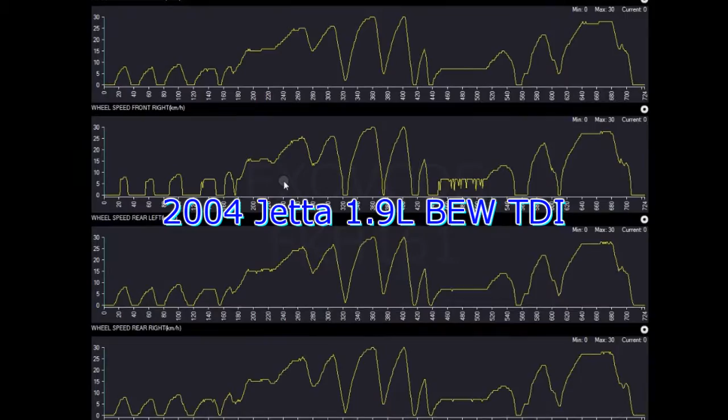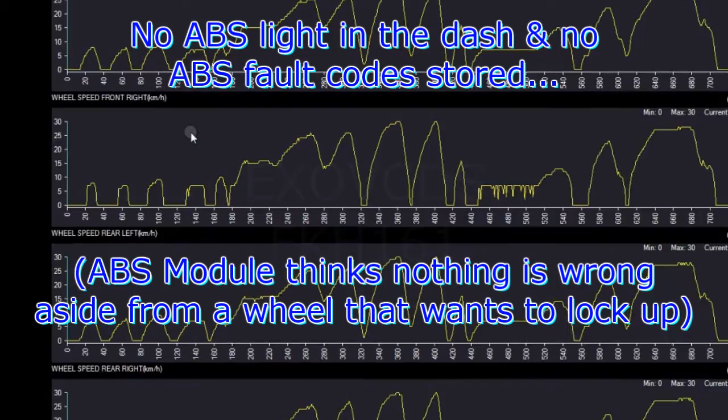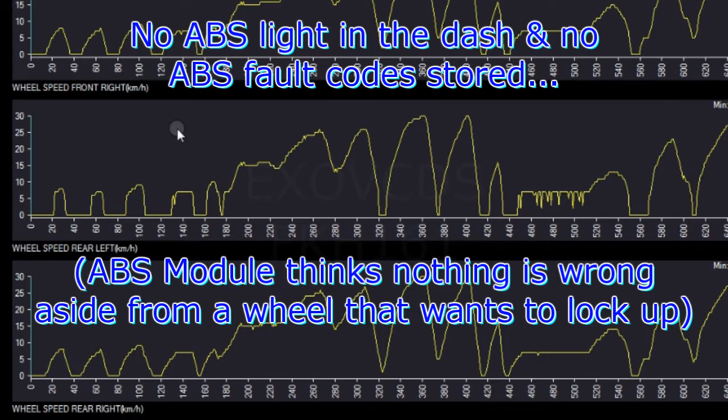Okay guys, this is a Jetta 2004 I think it was, so a Mark 4 or an A4 model. ABS would activate intermittently at slow speeds, mainly when slowing down. ABS light would not come on in the dash, obviously, and by obviously I mean that during normal ABS activation, when the computer thinks that a wheel is locked up, it will pulse the brakes when you're braking to prevent this wheel from locking up, in which case there is no need to turn on the ABS light, simply because it's a normal operation. It's what the vehicle was meant to do, or the ABS module was meant to do.

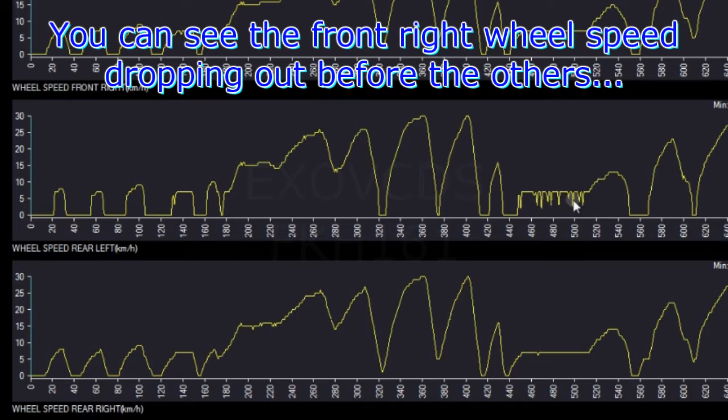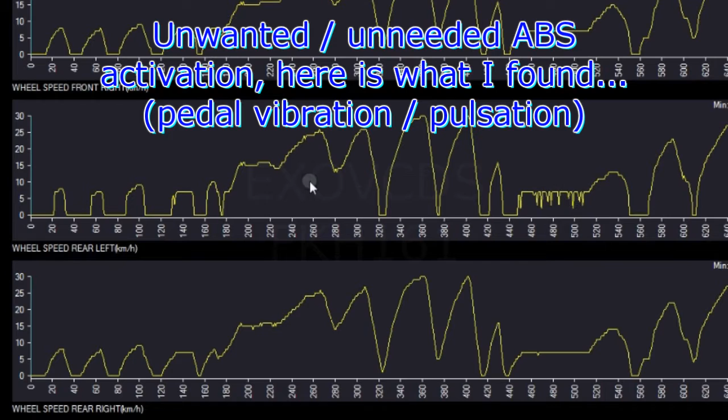So even though there is, let's say, a glitch, you can see the glitch here on that, it says wheel speeds front right. You can see the glitch here and right down in this area, dropping pretty much down to 0 kilometers in terms of speed, whereas the other ones are still registering just above 5, it looks like on the graph here. So basically what was happening was unwanted ABS activation that the customer was complaining about. More so just the pedal vibration, not so much ABS. I don't think the customer was aware that it is the ABS kicking in, just the fact that the pedal was pulsating. And the following clip is what I found.

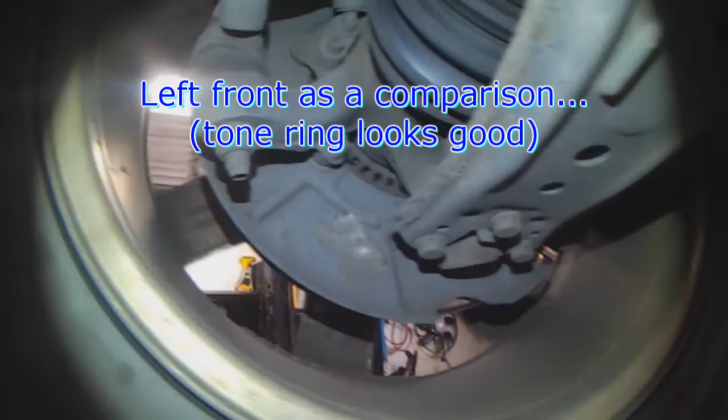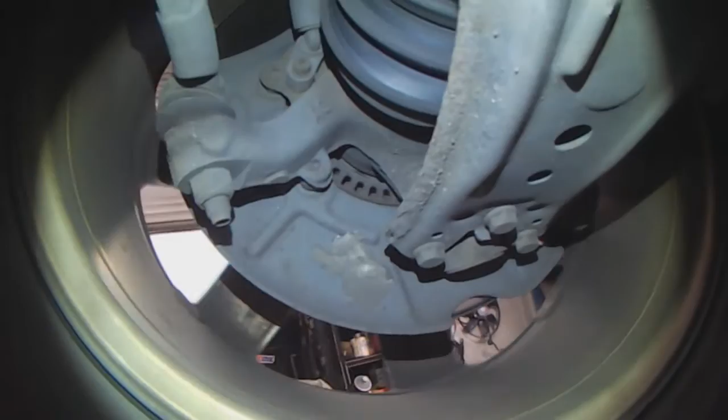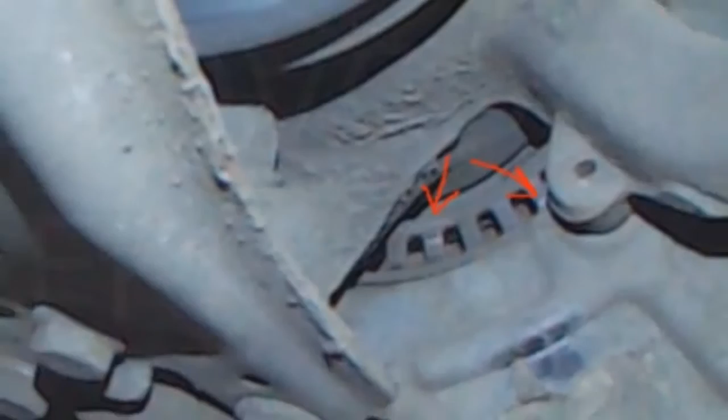So the right front speed sensor is the one that's cutting out at low speed. This is the front left. This is just so you can see or get an idea of the tone ring. It looks nice and even here. And on this one, you can see there's shiny spots. Seems okay right there. And then there's a shiny spot again. So maybe at one point in time something got jammed in there and it was rubbing.

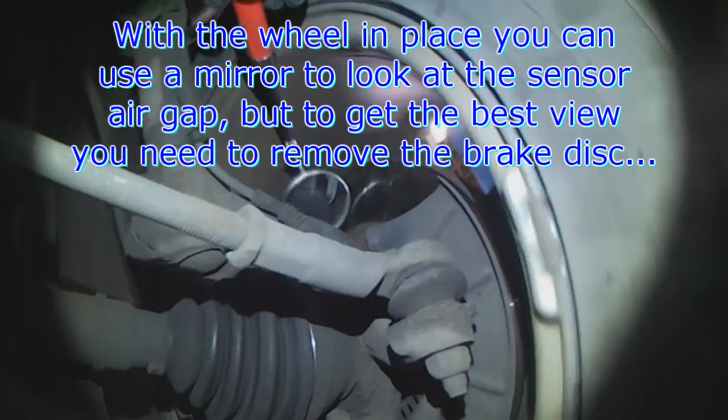Using a mirror, you can check the gap for the sensor. Kind of hard to see. Gap looks normal. Comparing it to the other side. See, this side might be sitting closer. It's hard to tell. Sometimes you gotta take the disc off to get a better view.

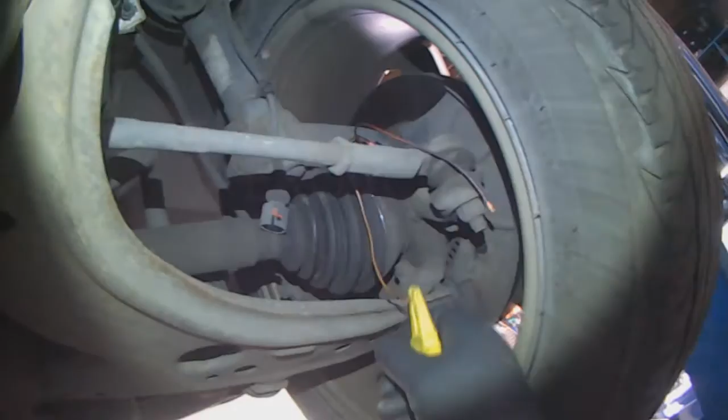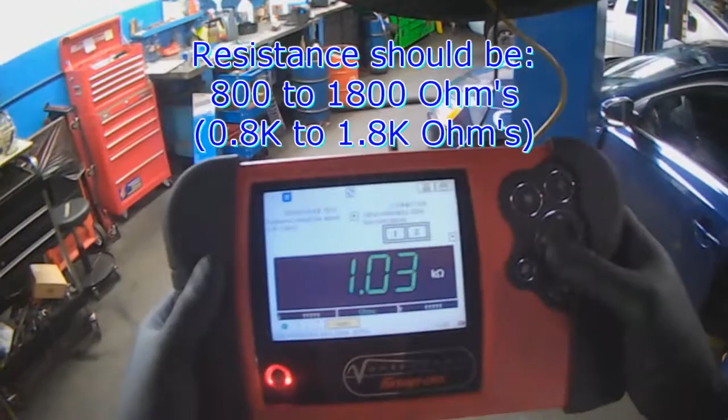I'll put my little adapters on the pins. Yeah, 1000 ohms. So that's actually within spec.

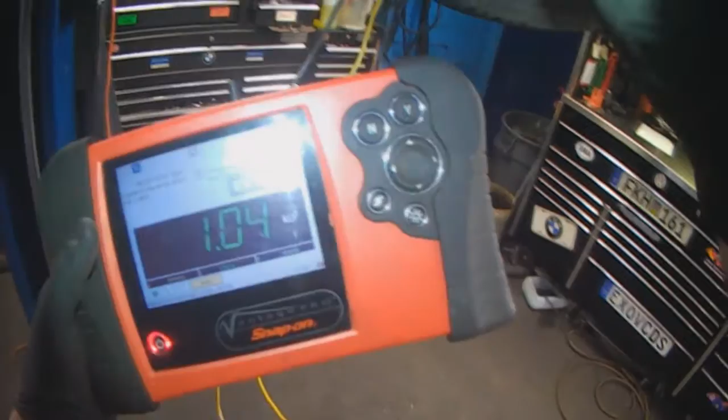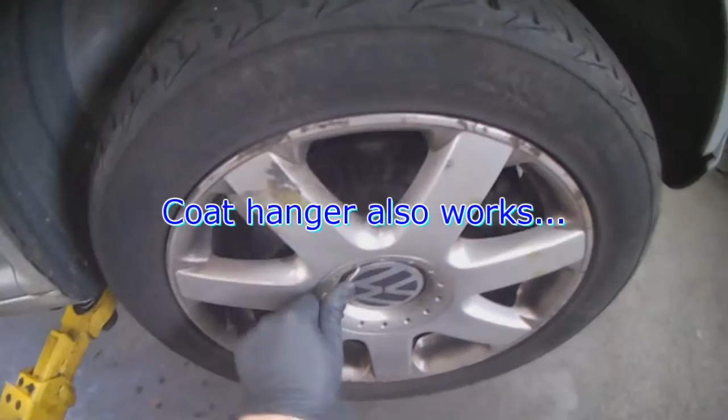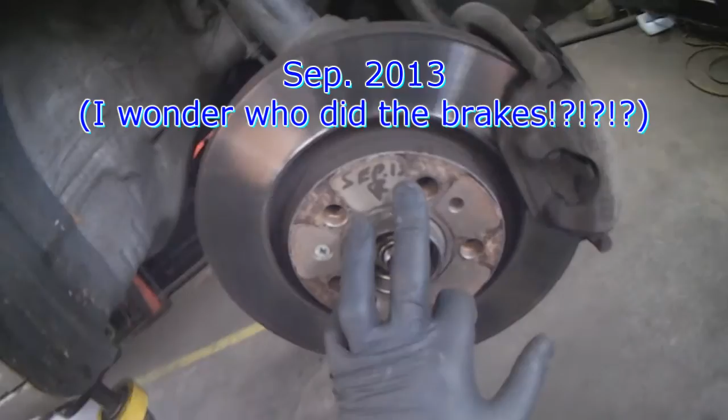1000 also, so resistance is exactly the same, so we're down to air gap then. No real need to do a voltage output test because the scan tool already showed us that the signal cuts out. Oh. September 13. Nice and even wear. That's what I like to see. 3 years old.

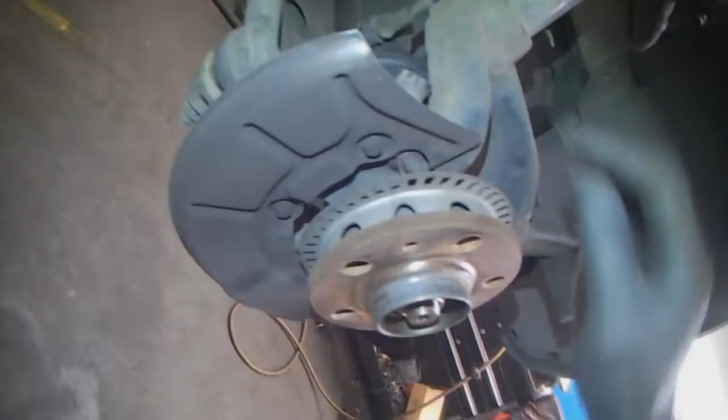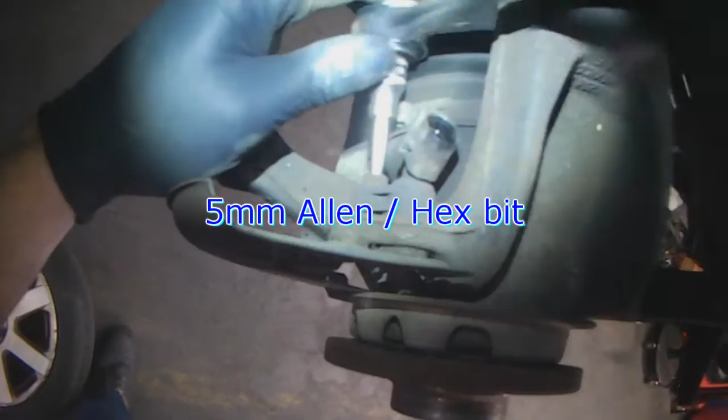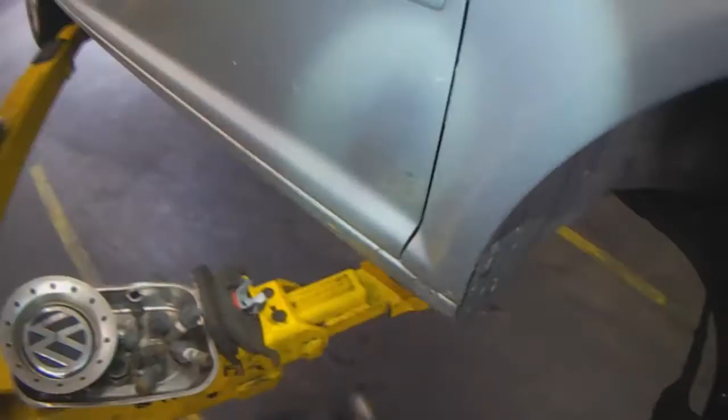So you can see the sensor is bent. Gotta replace the sensor. I gotta recharge my batteries. 5mm. If I can get it in here. It's not going to want to turn. Sometimes you got to break them to get them out.

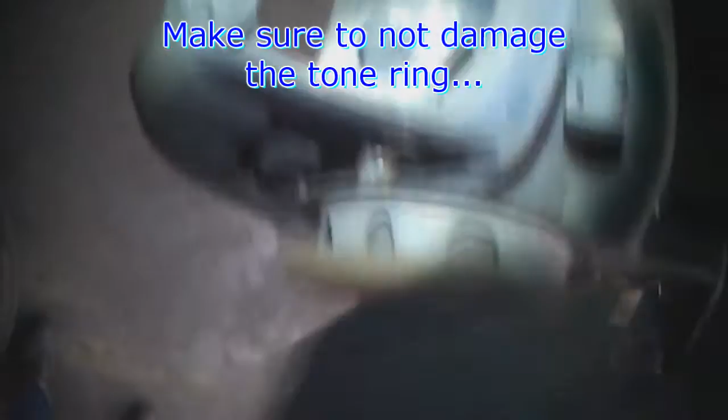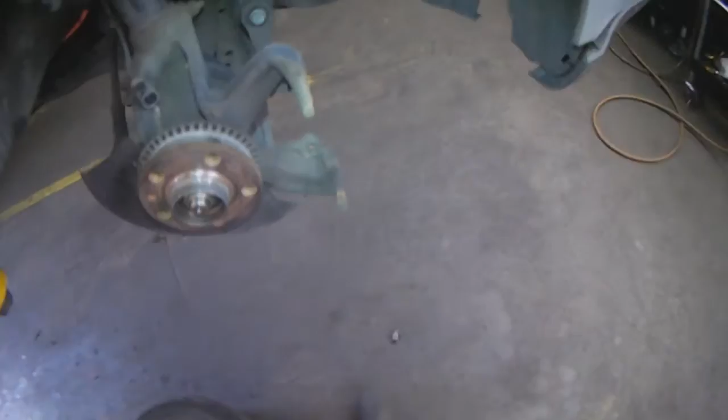Obviously try not to make contact with the tone ring. Something's moving. These are the micro windings of a sensor. Pretty cool. Just the outer housing left. Let's try to collapse it. It's moving. There we go.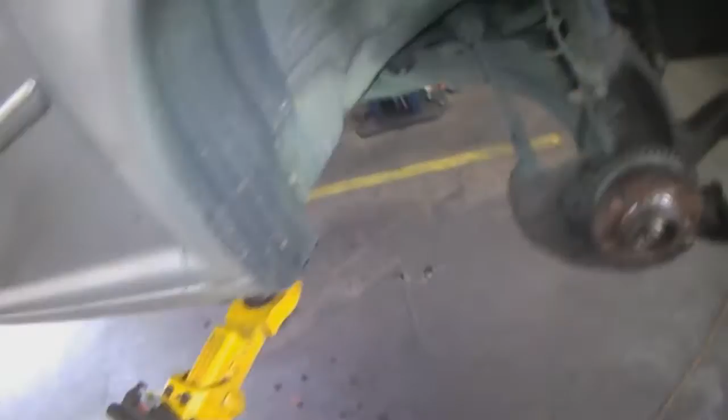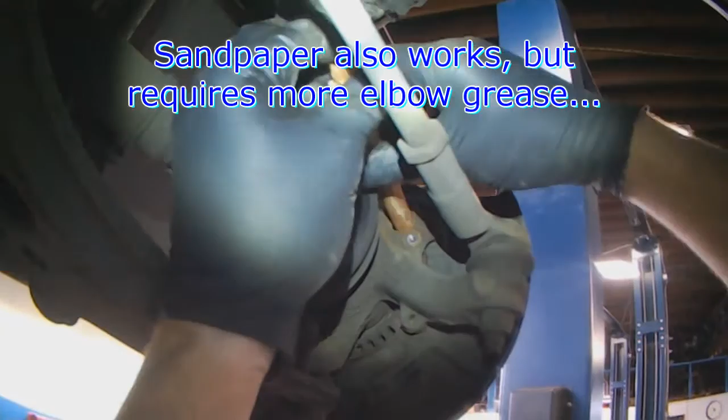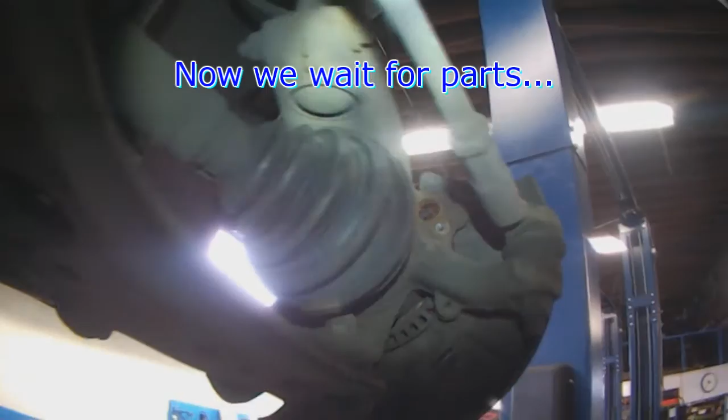Just got to clean the hole a bit, the bore, and install a new sensor. Tone wheel seems to run true. Don't forget to plug the sensors in. And this one we just got to clean the bore a little bit more. Probably be best with the CV joint out of the way, but that would require more time. Also roll up some sandpaper, let it expand, and work it back and forth. That's not bad. As always, gotta wait for the new part to show up and then take it for a test drive.

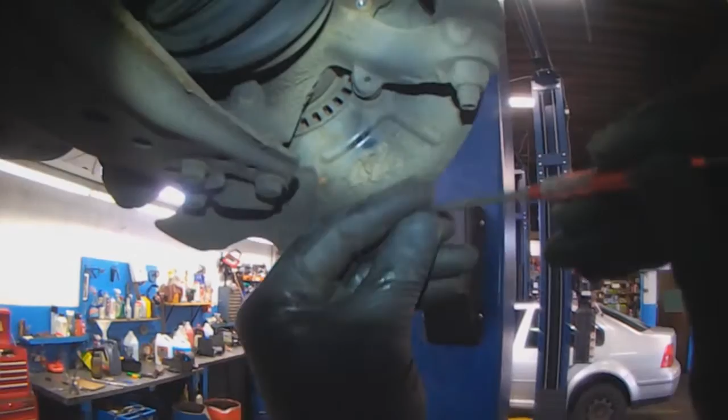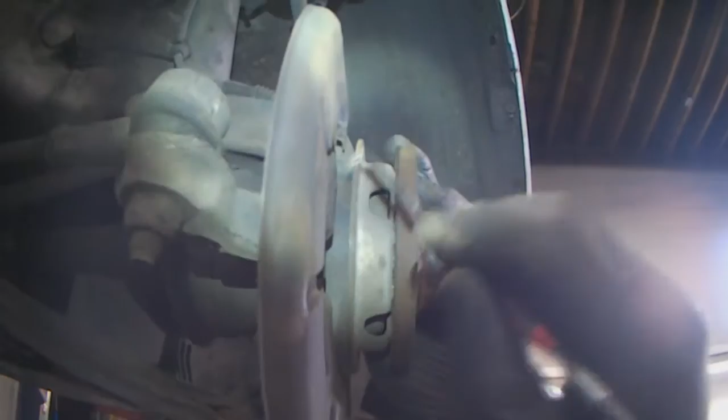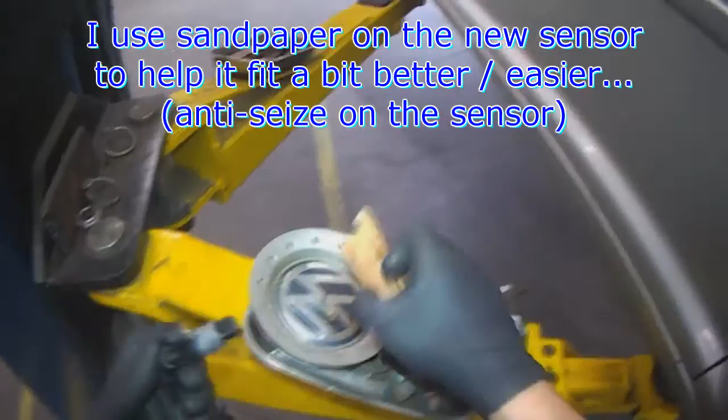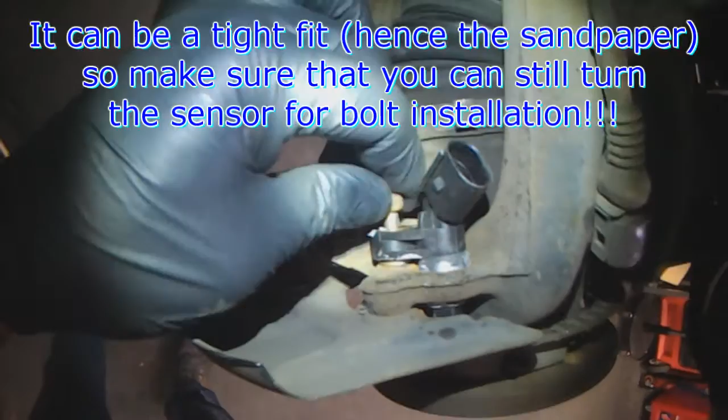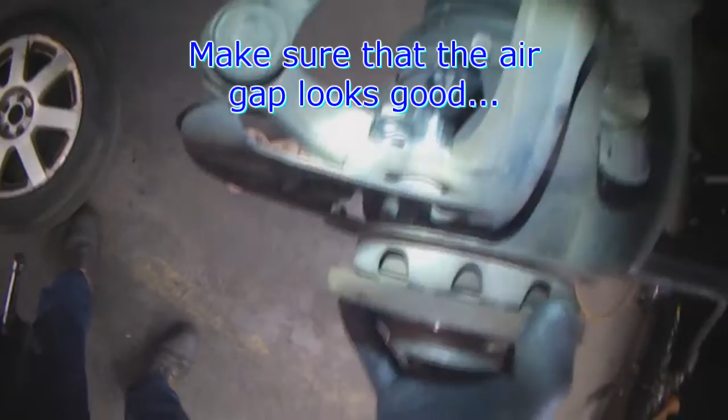Take out the new sensor. I usually take a little bit of sandpaper and I work it around the sensor to make the sensor go in the hole a little bit easier. Put a little bit of anti-seize on it and wiggle it into place. Be careful when it gets stuck, because you want to make sure that the bolt that holds it down in place still fits. Okay, and obviously tighten it down. Don't go nuts, it's a small bolt. Double check the air gap. Looks good. Don't forget to connect it.

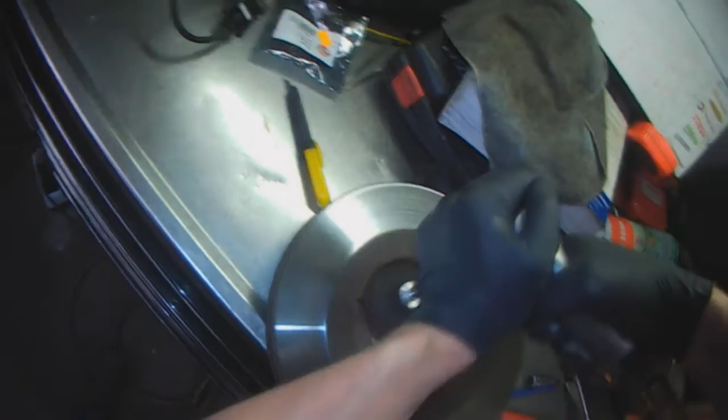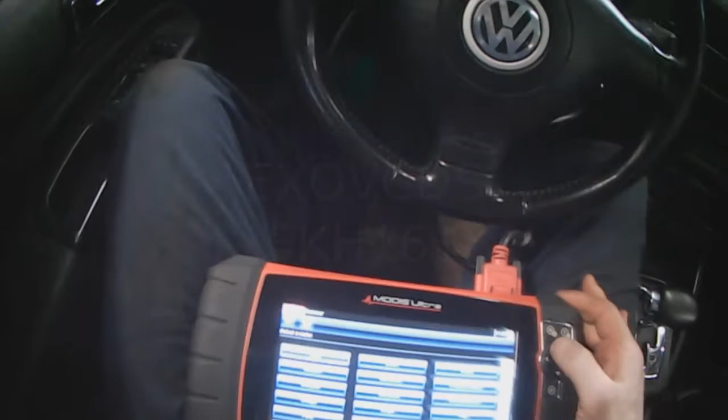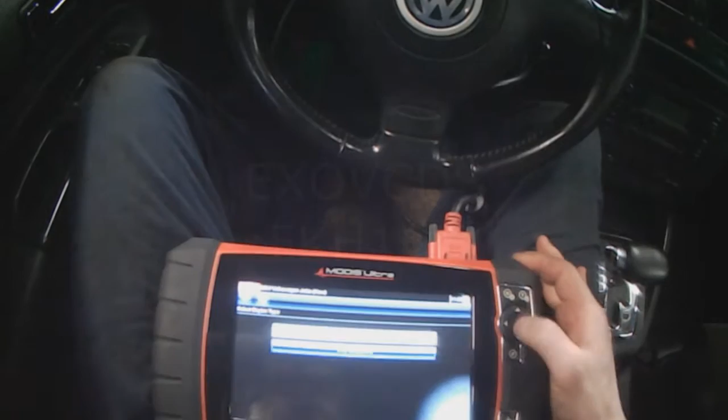I forgot to mention to make sure to check the tire pressure as well, because the tire pressure will affect the speed sensor signal because of tire diameter. 2004 diesel BEW. Sorry if the scanner's got too much glare. I'm gonna be inserting the actual captured data file anyways, so you should still see what's going on. Just pumping the brakes right now. I always pump the brakes after brake work, because the initial application is going to be low, it's going to freak you out.

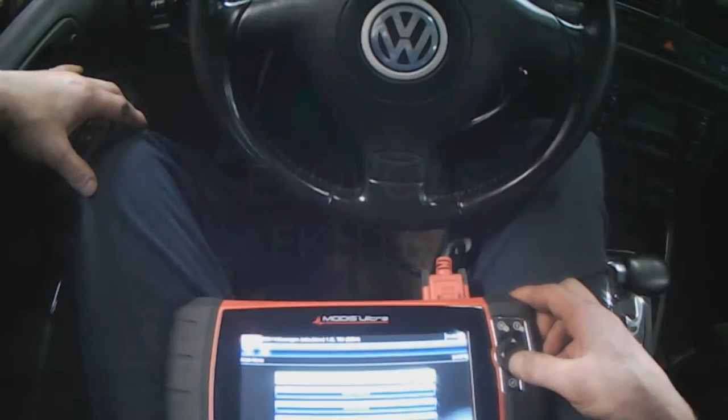Codes, no codes, data menu, PID list, we're just going to select the 4 sensors. There's a bunch of other parameters that I can also view, but we're just going to focus on the wheels, the speed sensors. So the second one here was the one that was dropping out early. Just going to back it out of the shop and go around the block.

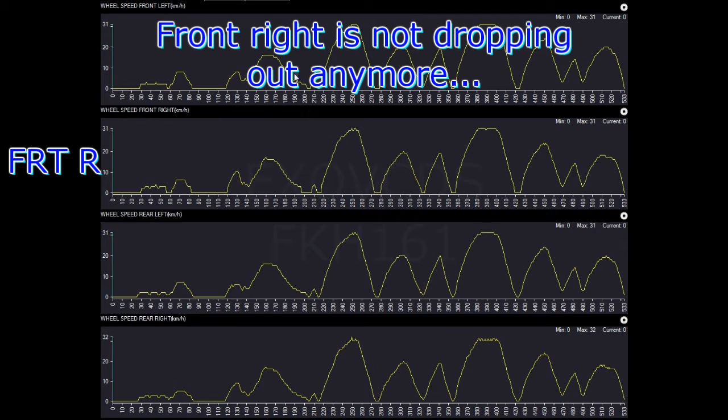This is just a quick follow-up to what you just heard and saw. Again, this is the good signal. You can see wheel speed front right, the one that had the initial issue, and you can see that it behaves exactly like the other wheels, where there's no more dropout, no glitches at all at the lower speeds. So that bent wheel speed sensor obviously caused an issue setting off the ABS or the unwanted ABS activation.